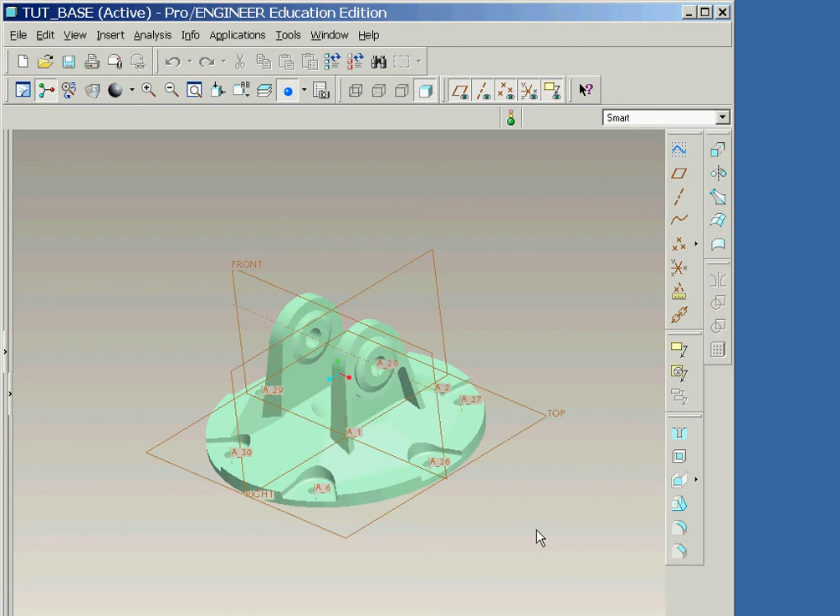Notice that the model is spinning about the red, green, blue triad, which is called the spin center. We'll now click the spin center icon in order to turn it off.

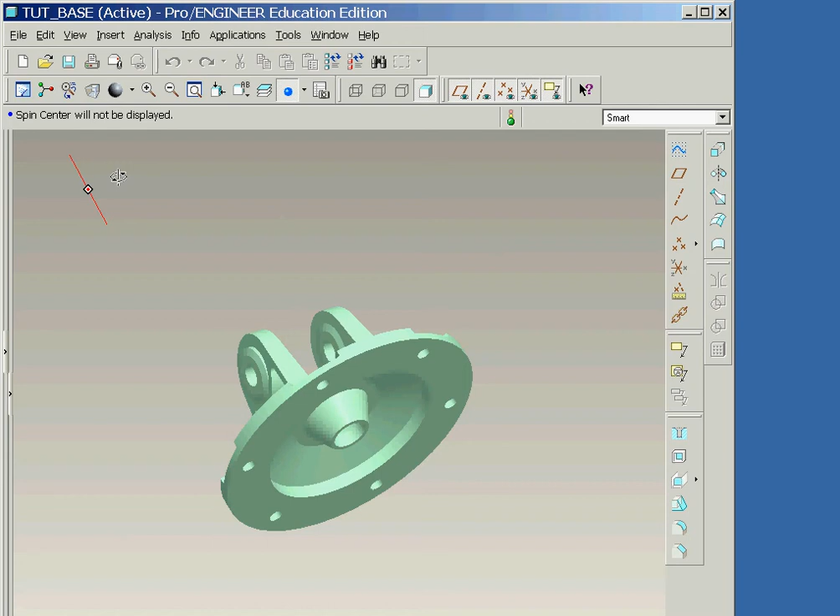And then again, spin the model by clicking the middle mouse button and dragging the mouse. Notice that the model is now spinning about the location where the cursor was positioned when the middle mouse button was depressed.

Another very interesting viewing option is available by clicking on the Orient Mode icon. When this icon is clicked on and we click the right mouse button, we see the pop-up menu shown here.

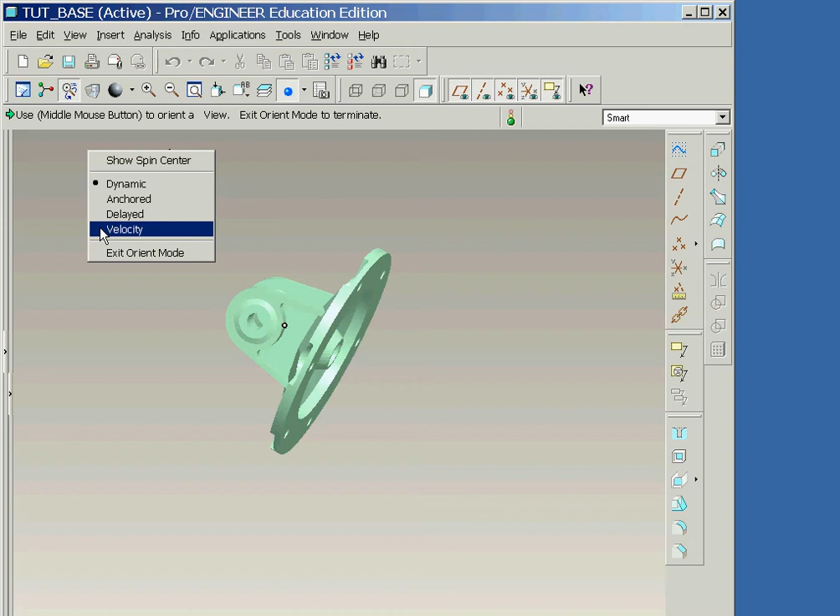We'll now select the Velocity option, and then again hold down the middle mouse button and drag the mouse a small distance. As you can see, the model will continue to spin as long as the middle mouse button is depressed.

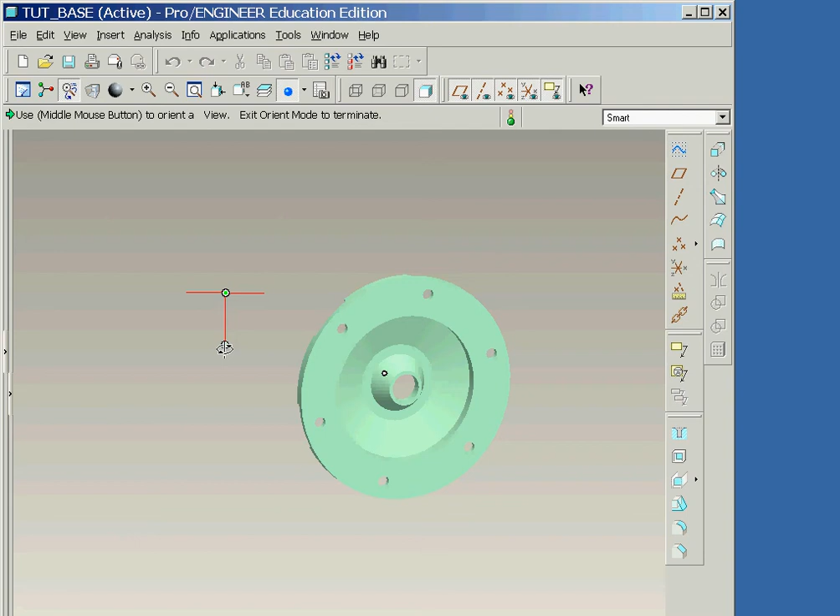In addition to the dynamic orientation illustrated here, there are several predefined views that are available by clicking on the Saved View List icon. As you can see, these views correspond to common views found in engineering drawings.

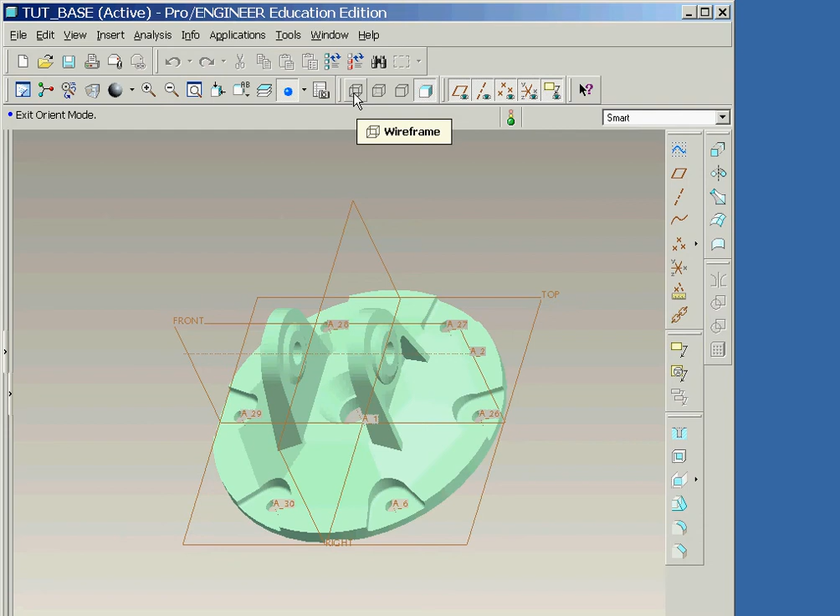In addition to changing the orientation, we can quickly change the display mode by clicking on the Wireframe icon, or the Hidden Line icon, or the No Hidden icon.

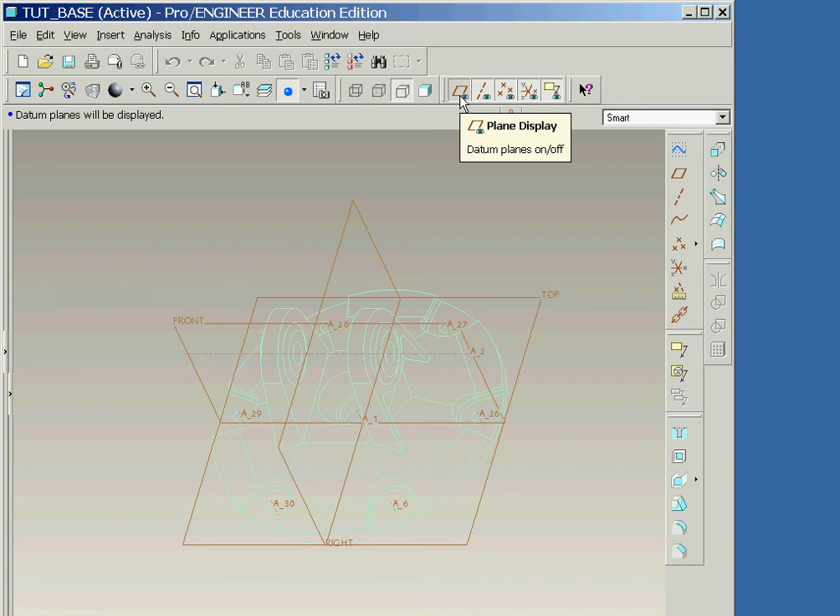In addition to the physical part, our current display contains datum planes and datum axes. Sometimes we will want to temporarily remove these datums from the display.

We can toggle these on and off by using the icons shown here, or by using the commands View, Display Settings, Datum Display, and then clicking on the check box next to the item we wish to remove from the display.

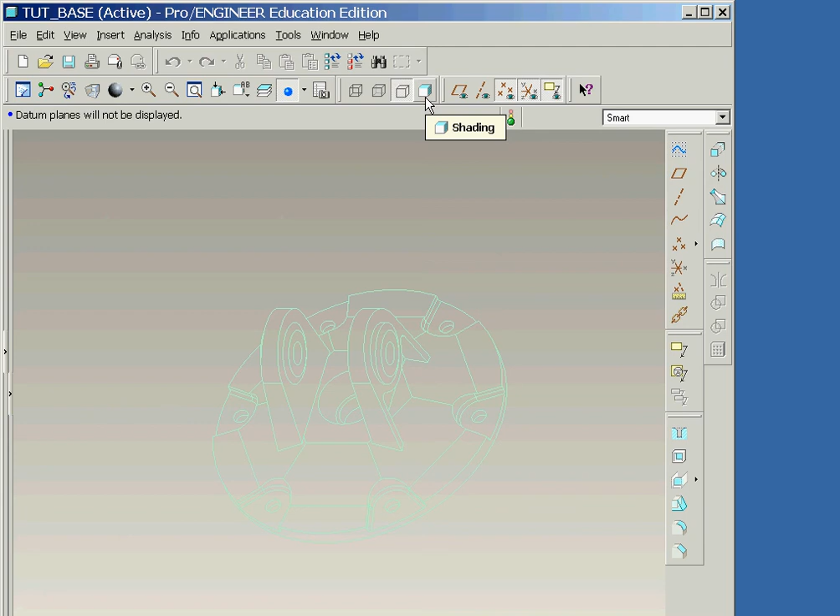As we will find in the subsequent lessons, the creation of parts in ProE is accomplished by constructing a series of features. A list of features used to create a part is displayed in the model tree, which we'll open now by opening the Navigator pane and making sure that the Model Tree tab is selected.

As you can see, as we click on a feature in the graphics window, the feature's name is highlighted in the Model Tree window.

We can also click on a feature's name in the model tree and see the corresponding geometry highlight in the graphics window.

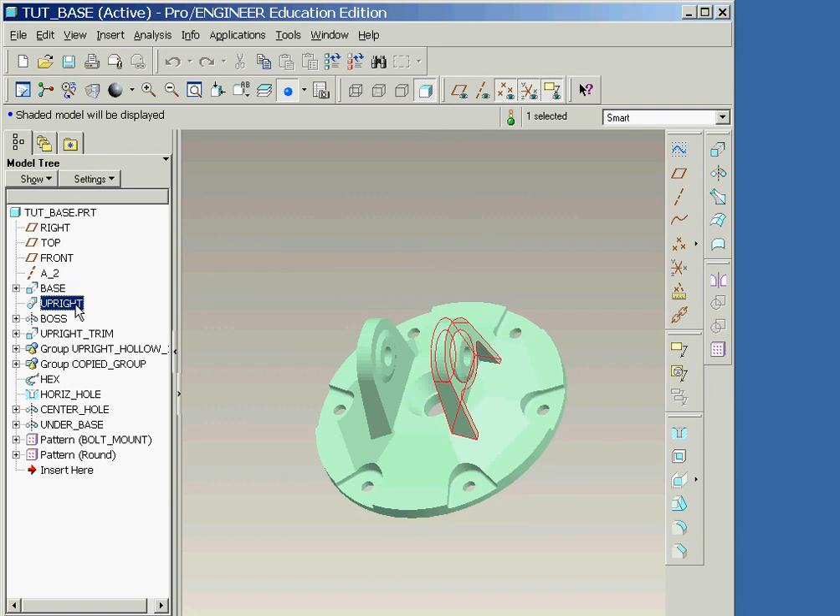Another useful technique that can be used to examine a ProE part is the Model Player option, available on the Tools pull-down menu.

This option allows us to rewind back to the beginning of the creation of the part and then step through the construction process.

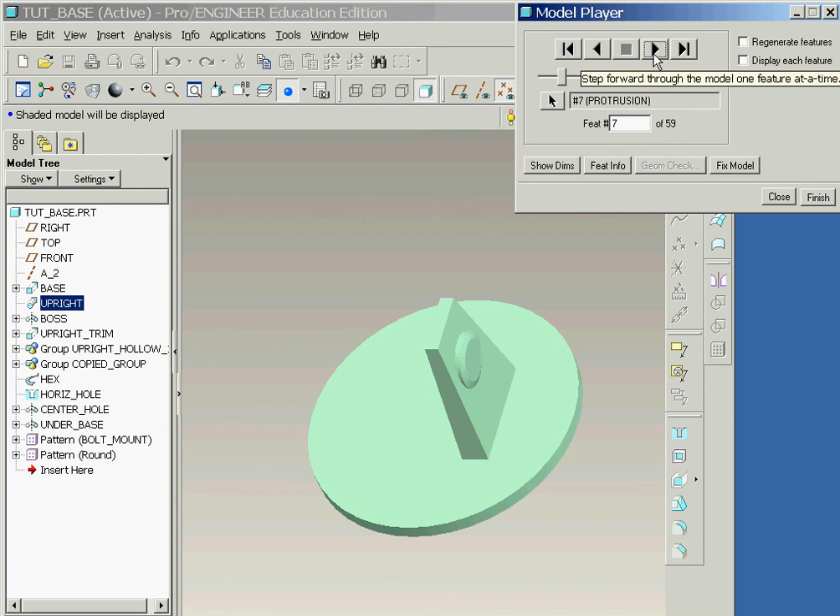In addition to creating individual parts, ProE allows several parts to be combined into an assembly.

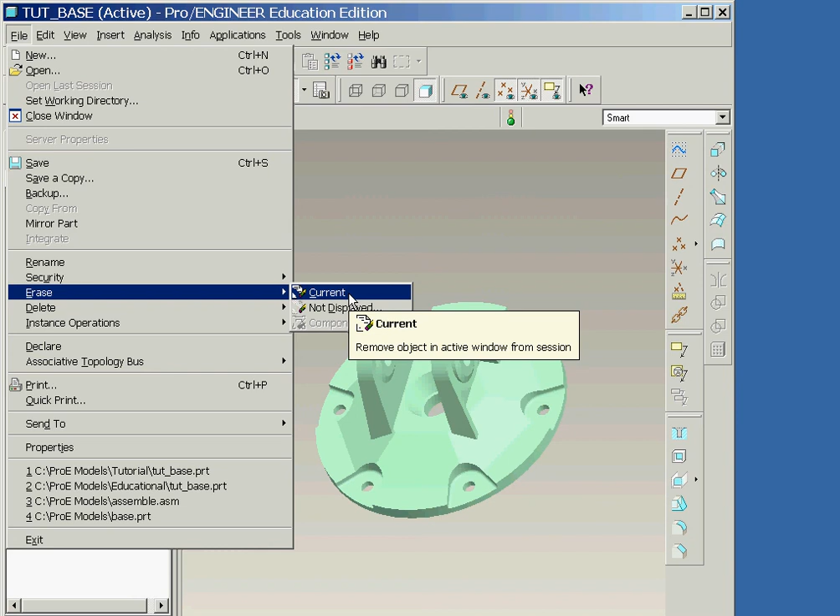In order to examine a sample assembly, we'll first remove the current part by using the commands File, Erase, Current, and then use the commands File, Open, followed by selecting the assembly file, Tut Widget.

Now, in order to better illustrate the different parts that are contained in our assembly, we'll use the commands View, Explode, and then Explode View.